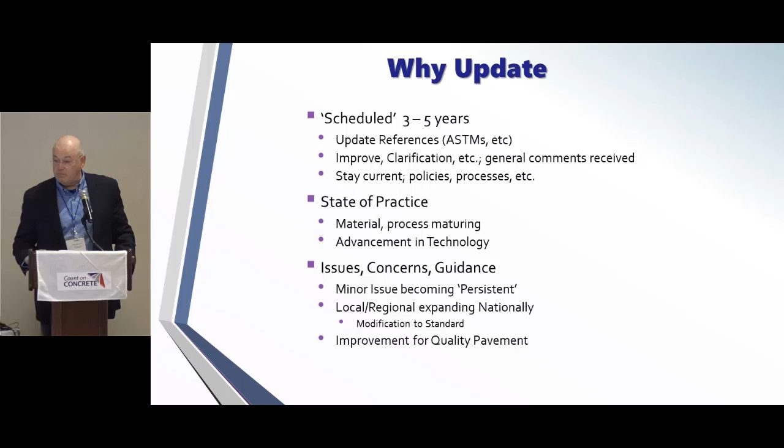Now, how do we know what to update? Well, a lot of that is based on comments and discussions and feedback that the FAA gets back from the industry, and they collaborate quite well with the industry. I've got a list of them here, and you'll notice we're on that list.

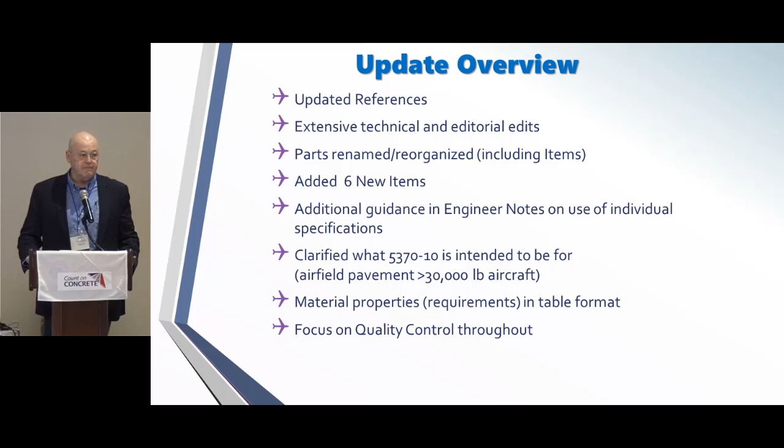Now, I like to think, and the fact is I know because these guys were good friends of mine before they became the paving engineers at the FAA, and so we collaborate. Doug and I talk, a lot of time by text message, on a daily basis because we have problems, they have problems, and we're back and forth on, okay, how do we solve this, what's doable, what's not doable. So they listen to us and all the other industries as well when they made this update. Some of it came from what was the MOS, modification to their standards.

So here's a quick overview, and I'm not going to go through each of these one at a time, but there was a lot of items that we worked on in the update on a number of the different P items. Our role mainly is collaboration. We are involved in working with the FAA in resolving a number of problems. A lot of them center around construction in the field, and we help members comply with the spec and get things done because it is a national specification and things are different locally, and sometimes we make adjustments on the local scene to try to get some materials used.

We do work with the FAA. As a matter of fact, they've actually asked us before in places where we have no interest in, no members, and no dog in the hunt to go and resolve issues for them. And we've done that. We spent our own money to work with the FAA. That builds a relationship where they understand that we're here to try to help quality control for them.

So our group, we have an airport task force, and that task force worked. Martin Holt is the chairman, and I've acknowledged a couple of guys there. Harold Honey with Michael Baker International was a former Air Force. He's a consultant now. So we had contractors, consultant. We had a chapter, Angela Folkestad from Colorado, Wyoming, who had airport experience. She helped us go through this. Golden Triangle, we met up here over in Pittsburgh in Pennsylvania.

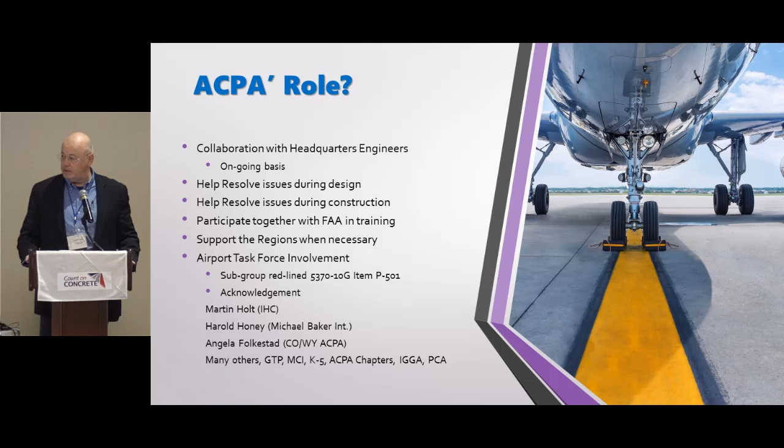Anyway, we met over there with their folks in Michael Baker's office, and we literally redlined the specification, the concrete specification, the P501, from front to back, every item. We went through it, marked it up, redlined it, and it's hard to tell exactly because of some of the wording and the way we moved things around, but we got about 80% of what we felt needed to be changed in the P501. So we'll move on real quickly.

These are the provisions that are important to us. C100 is brand new. It's a construction quality control or contractor quality control specification. It's always been in there, but we pulled it out and made it its own animal. And it's got a pay item associated with it, contractors. So you're required to do certain things, but you will get paid for it. And that should level the playing field where everybody's doing the same quality control, because this whole thing is centered around quality control.

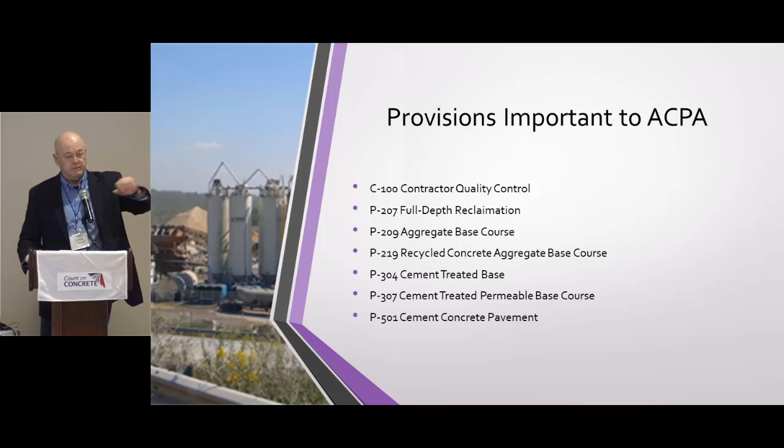These other items, and we'll touch on them real briefly as we go through here, because I'm already running out. I forgot to start my stopwatch, so right now I'm on 0. So I still have 30 minutes.

P209 is probably one of the toughest specs to meet in the FAA specification. We've had some problems getting aggregates to meet the dust ratio. That's the number 200 to the number 40 sieve. That's been changed. It was at 50%. We had a lot of good aggregates that were being turned down that were at 51, 52, 53%. It's been changed to 66, or 2/3 now, actually. And it's a stability issue with the aggregate.

And some aggregates perform better at 2/3 dust ratio than they would at 50% anyway, so we don't know where the number came from. 219 is a new recycled aggregate. You don't have to have a mod standard anymore to use recycled concrete for an aggregate base course.

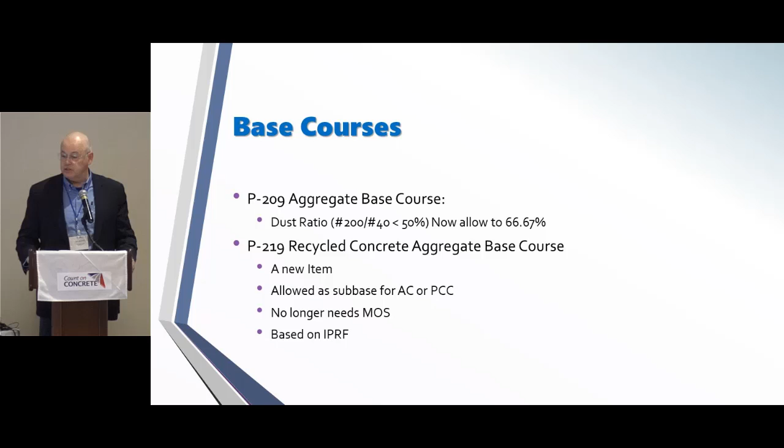The cement treated base was changed on acceptance. You don't have to lot anymore, contractors, with this because that's not a PWL item. It's not a percent within limits, so it doesn't matter. It's based off of the area. The density testing has been changed. Some engineers interpreted that we had to do a 3-point curve for every lot. That material that's coming out of a plant being produced is very consistent, so we got that changed to where it's only on an as-needed basis.

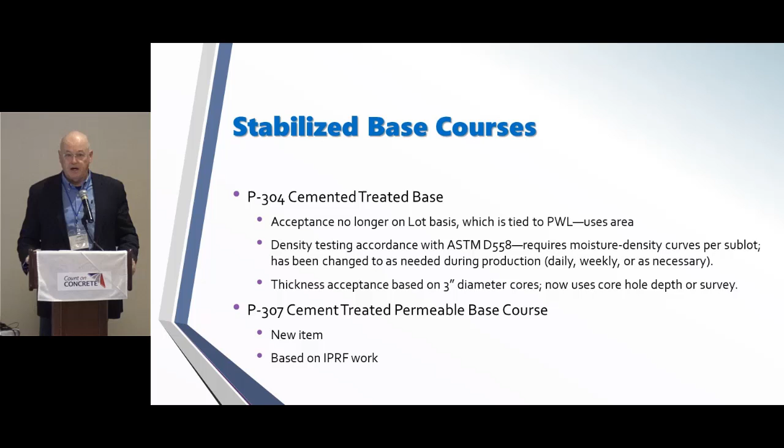The thickness is being accepted now on survey. If the engineer so chooses, he has the option to do it on survey, or you can do a 3-inch diameter hole. That material doesn't stay together every time when you pull that 3-inch core out, so we decided to measure the depth of the hole because we were getting a lot of complaints about how we couldn't measure it. So there's a permeable base that's now a new P item that's based off of some work we did with the IPRF.

Sorry guys, the reactivity testing is exactly the same. That was off limits. It's still the modified ASTM C1260, which is run to 28 days, 0.1% expansion. And the 1567 still has to be run, and it's a combined materials test. The FAA was adamant we leave that one alone, so nothing changed in that.

The aggregates, we refined the requirements for mixture optimization. The big thing is the engineer no longer is going to tell us what aggregates have to be used. That was being misinterpreted a little bit. The engineer is to specify the maximum size stone that they want, and then the contractor's free to use whatever the local material is that meets all the material requirements, and they can use that in any gradation that they want. 57s, 7s, it doesn't have to be 4s and 67s anymore, as long as you meet the maximum size that the engineer requests.

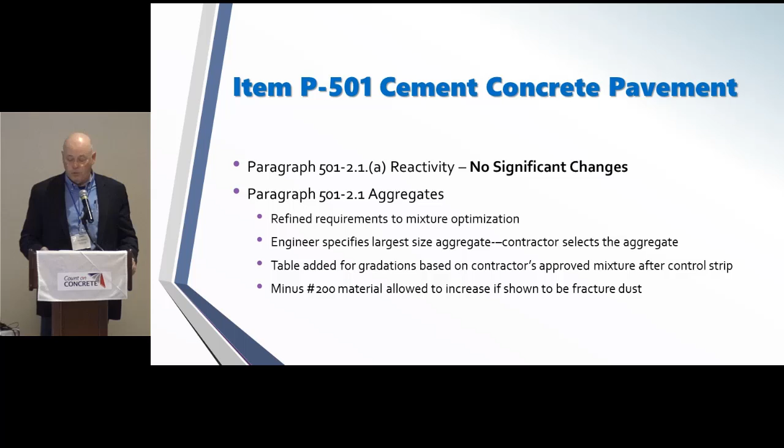The minus 200 material is allowed to increase. It's not like highways. It's like, what is it, 0.5% or 0.2%, something like that on the minus 200 material. That's referencing clays. It always gave us a problem because we had a lot of good limestone rocks that will go up to 1 to 2% whenever you start to move that stuff. So we've got that changed to where it goes up to 1.5%. We're still silent on where that's to be taken, and that was on purpose. It gives us a little wiggle room, so if we're still having problems, we still may be able to push that through with approval. So these are all good things that are going to help us in construction.

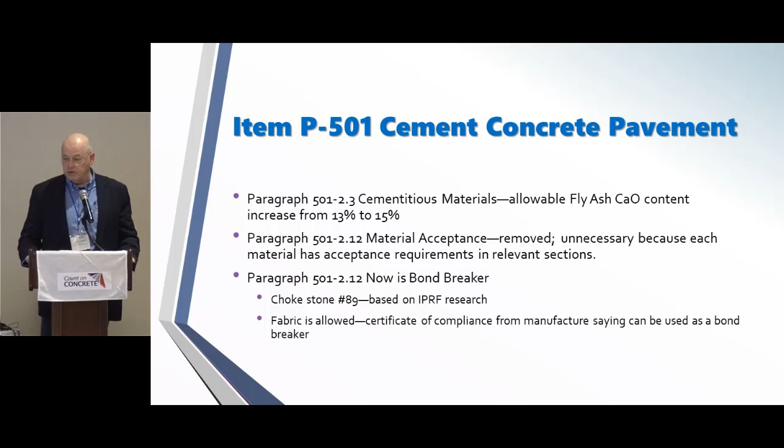The allowable CaO content in fly ash has changed, 13 to 15% in the past. That was to kind of try to eliminate some of the ashes. We're working on trying to get some more changes to that as well. The engineer decides if a bond breaker is needed and is to specify. There's a new spec for the bond breaker. The concrete mixture laboratory section's been moved. There's nothing changed in it necessarily.

Here's a good one for us. The mix proportions, the slump requirements have changed. There's no longer a specified slump from 1 to 1.5 inches for slip form paving. The contractor sets that with his machine and mix, and decides what it's going to be, up to 2 inches. The slump allowed for fixed forms has changed to 3 inches, and for hand placements it's going up to 4 inches. It's almost impossible to get a 1-inch slump out of a ready mix truck to put in a fixed form and try to hand finish that thing.

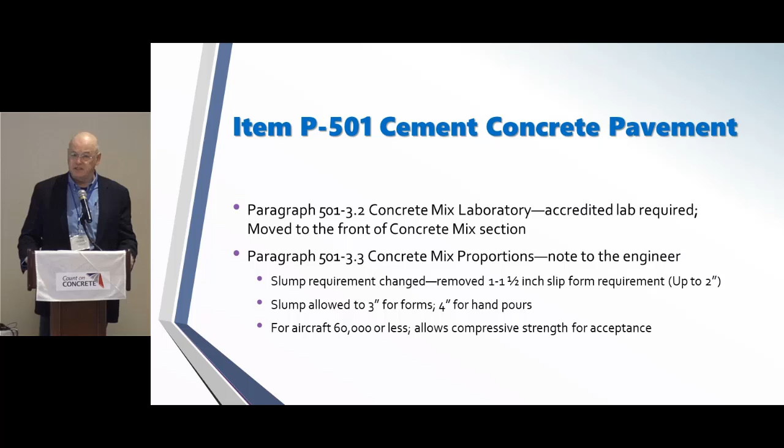For the state folks, this is good news: for aircraft 60,000 pounds or less, you're allowed to use compressive strength. You can probably get that through for any project. You just have to do the mix correlation to do it.

The concrete mix submittal has got its own section now, been moved. Its requirements are in it, what needs to be in that submittal, to make it a little more clear.

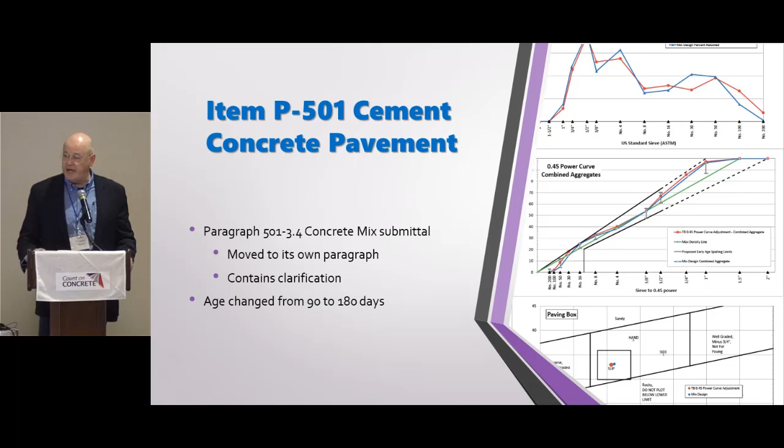The age has been changed from 90 to 180 days. A lot of times a project shuts down, especially up north, for 90 days easy. Everything's still there, nothing's changed, but if it's more than 90 days we were required to resubmit a new mix design. So we changed that to give a little more leeway.

Control strips are now required. This is not just for P501, it's for all the P items. We had a little bit of complaint internally about that. They're 250 feet for both the pilot lane and fill-in lane, but we felt it was probably as much an advantage to the contractor as it is to show the owner that we're able to produce and demonstrate that the materials and mixture will give the quality that we want. It also gives us a visual representation of what's expected during production.

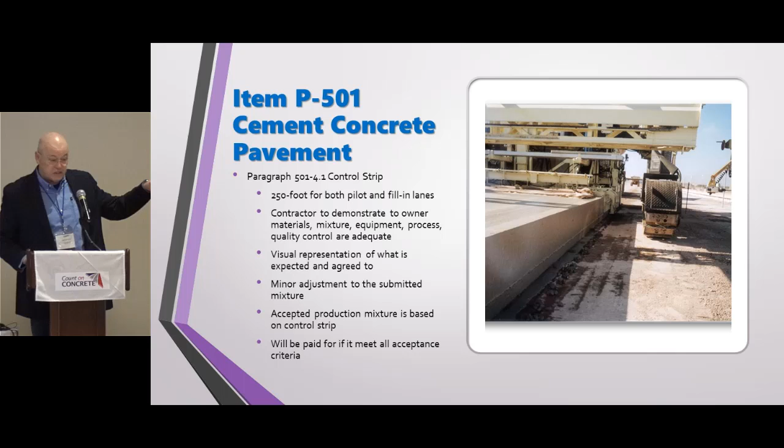So we think it's paid for if it meets all the requirements, just like anything else, but it gives us a chance to work out the bugs and get everything running smoothly. And if there's a discussion later, we can go back to the test pour and say, look, this is what we agreed to in the beginning. So we see that as a positive.

Several things on the equipment here. The authority to approve the paver is not an engineer's responsibility. There's no standard given. I've been the engineer of record before, and I used to know nothing about a slip form paver.

I'm learning more, and for me to have that approval and walk out and try to approve a guy's paver just because it may be dirty or whatever, I don't care. If he can place concrete and do it to the standard that I want, it doesn't matter. That's his business, he's got to be able to produce it.

We've added ASTM C685 to cover volumetric plants. We do have one plant manufacturer that's starting to get a little traction.

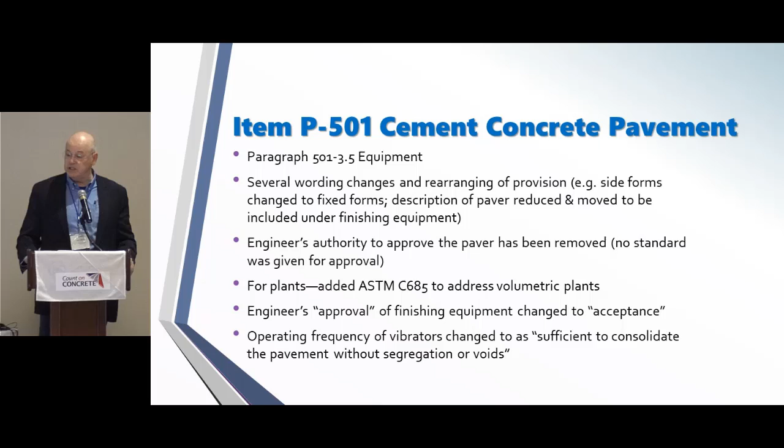Change in the operating frequency of the vibrators. It used to be 8,000 to 12,000 vibrations per minute. That's nuts. Some of these optimized mixtures run around 7,000, and if you go up over 8,000 you're going to get segregation. So that's changed to state sufficient to consolidate the pavement without segregation or voids.

Some other things have changed, and I'll skip the redundant ones, but the track line edge design is now the engineer's responsibility. It was being placed on the contractor, and some may try to skimp or not have enough space for the track line. They felt they weren't really getting paid for it, so now there's about a 3-foot requirement in the design guide for the contractor's track line, and it becomes part of the section, so it's being bid by all the contractors.

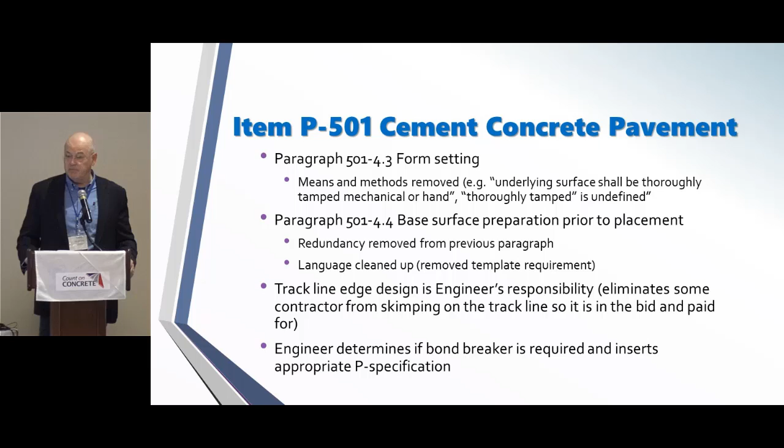The engineer will determine if the bond breaker is necessary. The 30-minute time limit is a bit of an issue - we've had loads rejected that were 31 minutes getting there on a cool day in October, which is nuts. So there's been some guidance on that, to be reasonable based on where the plant is, so it's not hard numbers like they used to be.

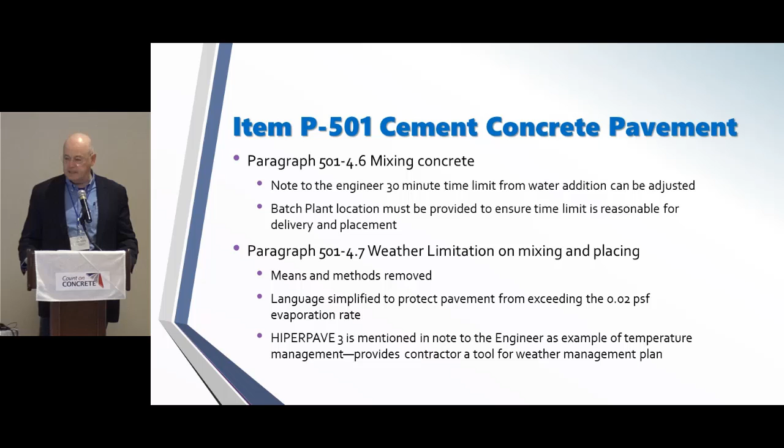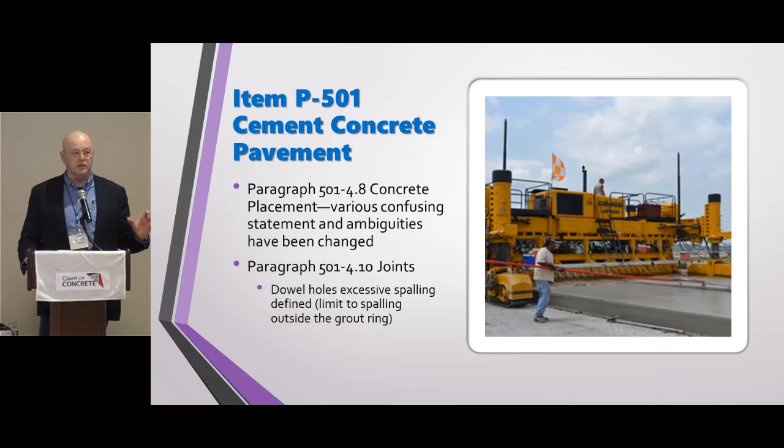The concrete placement had a lot of confusing language, we've changed some of that. We've defined excessive for the dowel holes, as long as it's not outside the grout ring we're not going to get too concerned about it.

The means and methods have been taken out of some of the finishing techniques - we were trying to get a little overzealous on how we specified that. The 1/8 inch mortar-rich surface has been changed to 1/4 inch. I don't know how you measure either one of them, certainly not 1/8 of an inch, and don't know what you'd do if you got it.

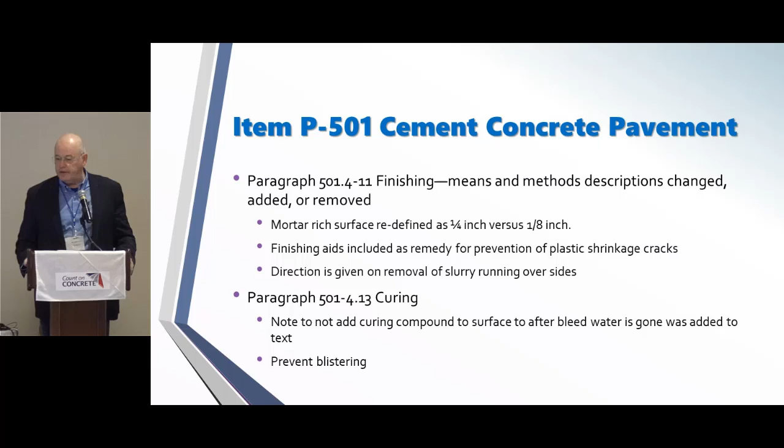So let's see, honeycomb - that was another one where we've had a number of projects where you pull the forms off on a fillet and there's a little bit of honeycomb on the side because we're hand placing that 1-inch slump concrete, if you recall. So we had a little bit of problem with that, and we gave some form of a definition. I don't know if it's right or not, but it's better than what we had, because we used to argue about what was excessive and what wasn't.

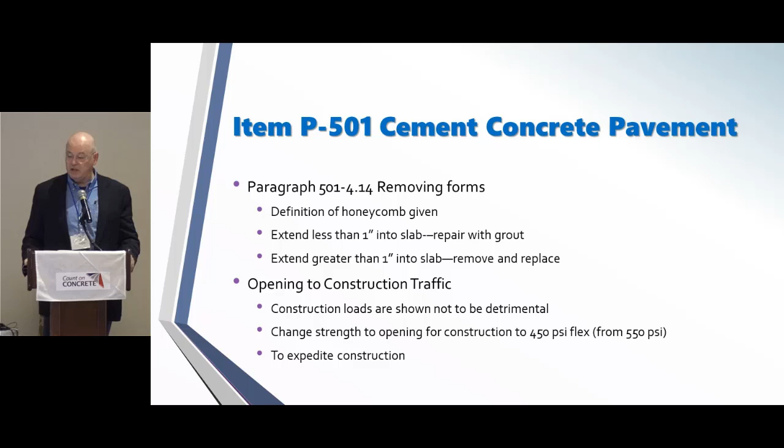Opening to construction traffic has been changed to 450 PSI from 550 for aircraft on fast track projects. So 450 helps us get on it quicker to expedite construction.

Some of the parameters in the repair, removal, and replacement have been changed. We did add high molecular weight methacrylate as a repair remedy for shrinkage cracks. That used to be in the spec as 4 inches or more - it came out. Well, guess what? This may be a shock to most of us in the room: a 4-inch crack on a 6-inch pavement is a little bit different from 4 inches on a 20-inch pavement, and yes, we have a lot of 20-inch thick concrete in airfields. So we changed that to 1/3 of the depth.

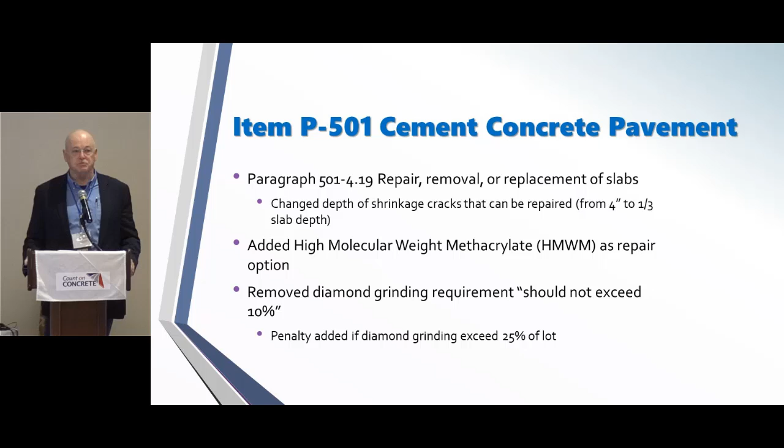There's been some penalties added. The 'should not grind more than 10%' has been removed. If you grind more than 25%, 95% pay is the maximum. Same thing where we have a lot of spall repairs.

Contractor quality control, as I said, has moved up to its own animal. The California profilograph has been removed from the spec - it's no longer a requirement. The smoothness spec is changed.

You can use rolling in whatever that machine is. Yeah, who said that? Somebody got it. If you're from the South, you can't say inclinometer - I promise you, it's a challenge.

So the smoothness, unlike highways - now wake up highway people, this may interest you - we don't give a crap how smooth it is as long as we don't damage the airplane. It's not a ride spec.

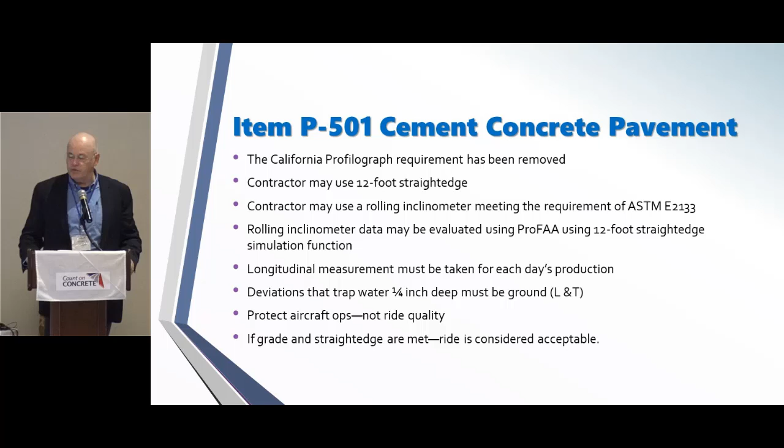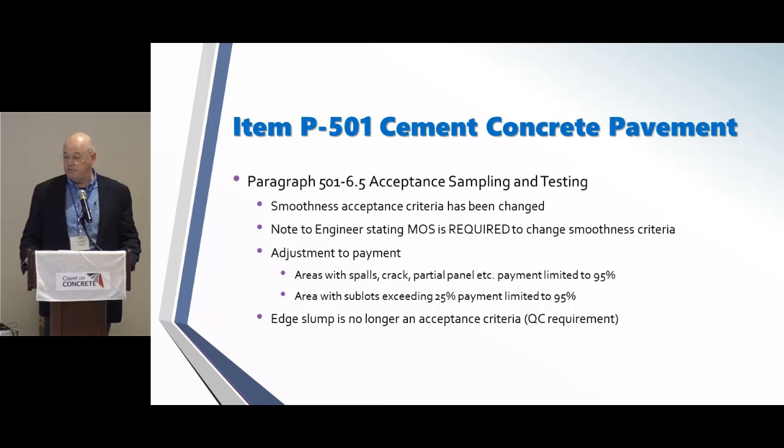There's no deduction for smoothness if you meet the 15 inches per mile, and you must file a modification to standard to change it. So that should help us as far as getting penalized for smoothness. There are adjustments now for areas with spalls and areas that received 25% grinding.

Edge slump is no longer an acceptance criteria. That doesn't mean you don't have to meet it - that's a quality control parameter. You've got a straight edge test and a lot of other tests, and if you meet all those, edge slump's not a problem. So why the hell do we have to have an edge slump acceptance criteria? These are the acceptance criteria: strength, thickness, grade, smoothness if it's on a runway - and it's to protect the airplane, not to protect the passengers.

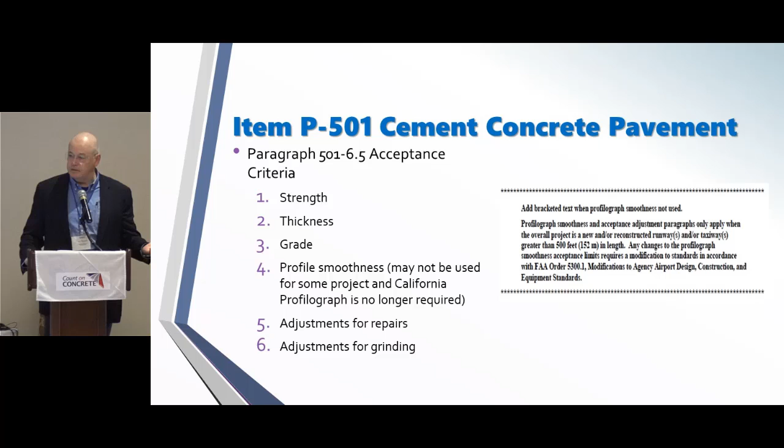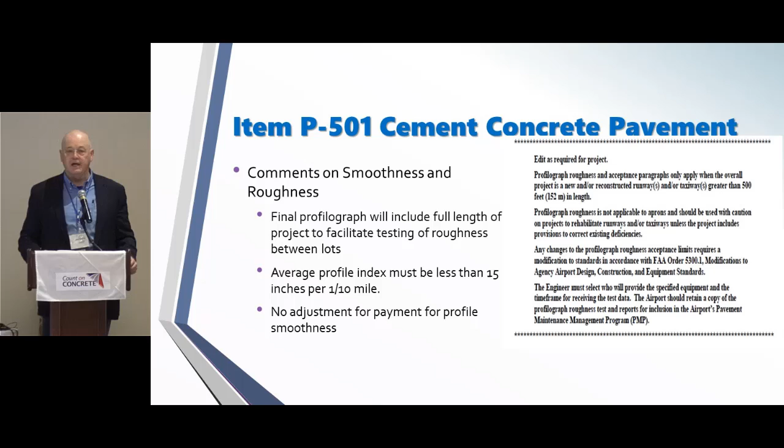And there's some adjustments for repair and adjustments for grinding. Again, I won't comment on the smoothness other than the overall profile of a runway has to be made - that's a pavement management issue. The FAA is collecting data. They want the 15 inches per mile so they have something to compare to in the future.

Whew. Damn, I'm tired. I went through that. I don't know, I'm still on zero.

I still got 30 minutes for questions if y'all have any. I'm sure there's not one, since the contractors are the only ones, and they don't understand - they don't read the spec anyway. So, it's yours.